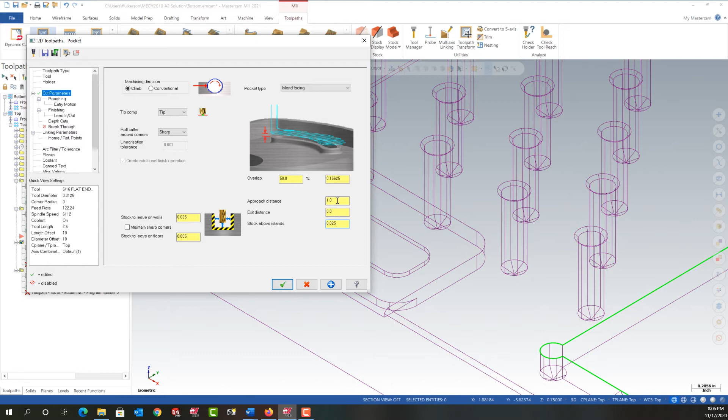So I'm going to go into these parameters, and it's no longer an open pocket. It's now an island facing. When I machine an island, there's a couple of things I have to do. I have to tell it where the island is, and I haven't done that yet. So I have switched it to island facing so I don't forget. Also I can set these up. While I'm here, I want to leave 25 thou above the island for machining. I'll leave the approach distance at 1. I don't think it'll work, but I'll play with that later. For now, I'm going to say OK.

Again, I'm not going to accept that because for island facing, I have to machine the bottom of the pocket geometry and the top of the island. So I need 2 pieces of geometry minimum. So I'm going to go back to the geometry again, right click, and tell it I want to add a chain. This time I'm going to chain the top of the island and I'll say OK. Once again, I'll say OK, and same thing for this toolpath. Click here, right click, tell it to add. I'll add this chain on top, and I'll say OK. The direction arrows don't matter.

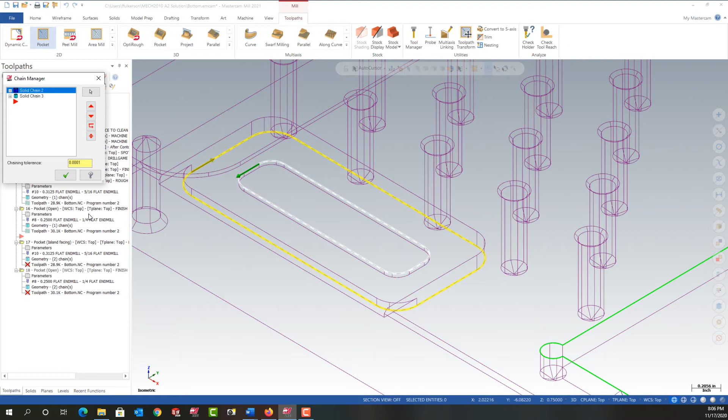So again, I say OK, and then one more time we'll go into these parameters and take a better look this time. So I have island facing. I don't need to change anything else. We'll go to the linking parameters, since the depth isn't correct. Let's select the depth tab and tell it the depth is down here. So it has the new depth, and I'm going to say OK. I'm going to do the same thing here. I'm going to come into the parameters and change the depth to the bottom of the island.

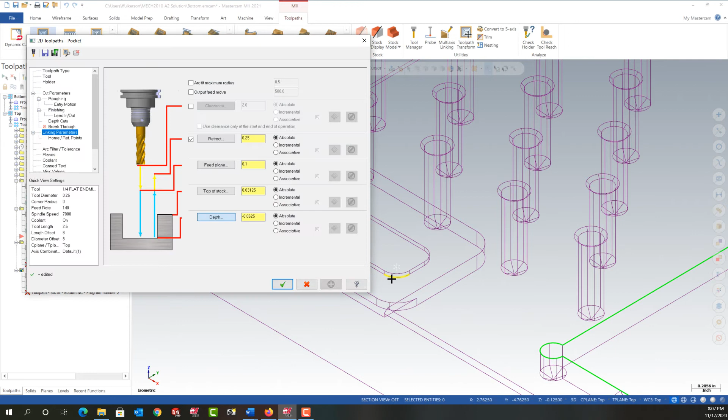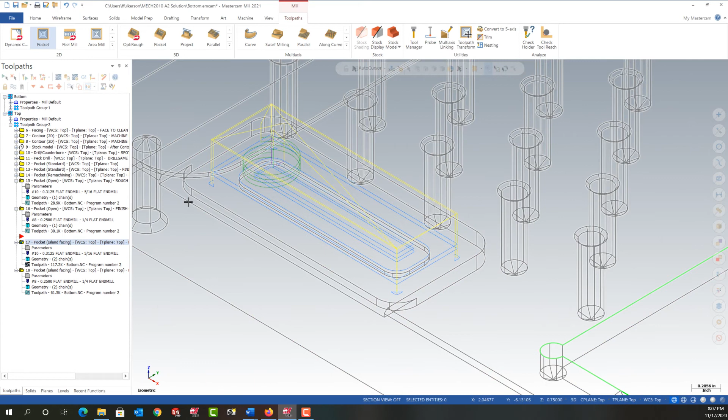Then I'm going to come back and double check everything. Once again, it's not an open pocket, it's an island facing pocket. I don't want to leave anything for finishing. I'll say OK, and now let's try regenerating those 2 dirty operations. I'm going to say regenerate all. They appear to have worked. I'm going to select just this operation and show its cut lines. Those look reasonable. I'm going to turn them off. I'm going to select this one and show its cut lines. Again, they look reasonable, but it's doing depth cuts.

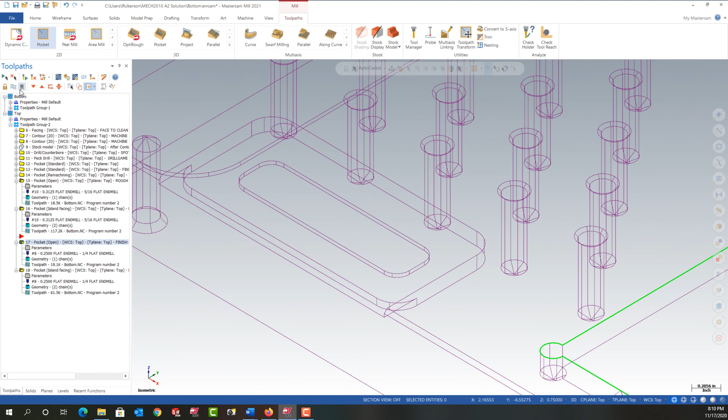So now that I see the depth cuts there, I'm going to go back through all of them again because I was told not to use depth cuts. So let's check this one out. I accidentally turned it on. I'm going to say OK, and I'll regenerate it. Let's look at its cut lines. It's good. Then I'm going to look at this one, make sure there's no depth cuts. It's good. Then I'll look at this one. It's good. And then I want to look at this one. It still has the depth cuts, so I'll go back in its parameters, uncheck depth cuts, say OK, regenerate it, and that looks better.

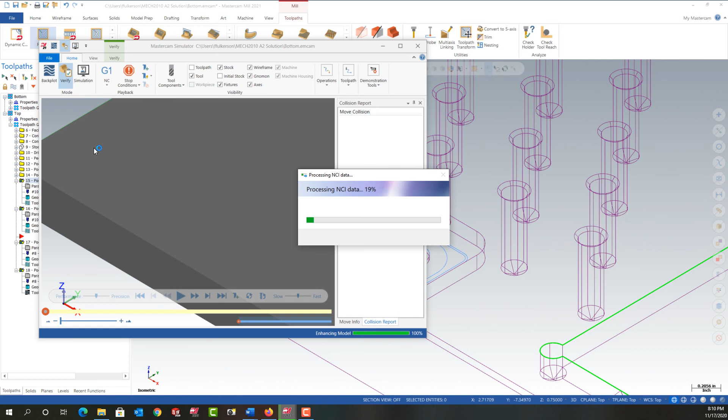So now I want to see how these look. I have the last one selected. I'm going to hold Shift and select the first of this pocket, so these 4 toolpaths. Then I'm going to go into the simulator and simulate just those 4 toolpaths. So I'll say OK, and let's just turn on our color loop so we can see where the 2 tools touch. We see the island and it's all cleaned up. So everything looks good. I'll save my work and continue.